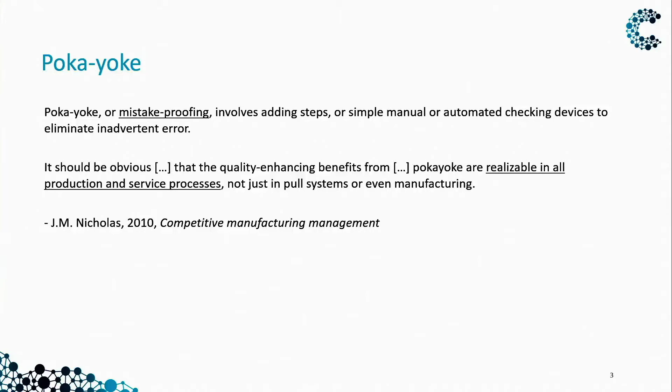In my title, I use the term Poka-yoke, so let me introduce this concept a bit further. Poka-yoke, or mistake-proofing, involves adding steps or manual or automated checking devices to eliminate inadvertent error. However, Poka-yoke is not limited to manufacturing operations. In fact, it can apply to all production and service processes, including production engineering. I will show you how this works by using a practical example. But first, some positioning.

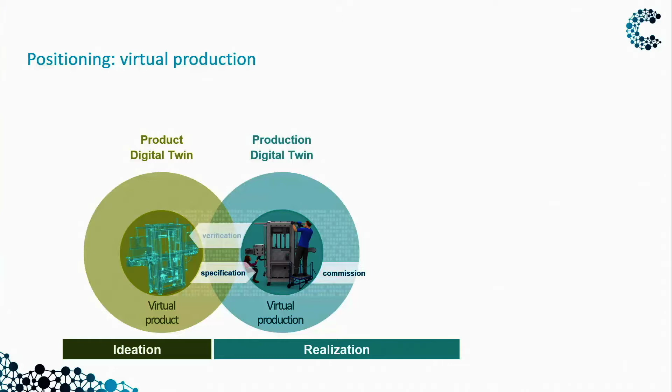Our starting point is a product design. Nowadays, nearly all products are developed using CAD tools in 3D, including data management systems. This product design forms the starting point to think about production. First, however, we will build up the production system in a virtual environment. This way we can optimize the production without making big investments. Once we have optimized the production and made sure it will deliver the right amount at the right time, we can start up the real production to deliver the real product.

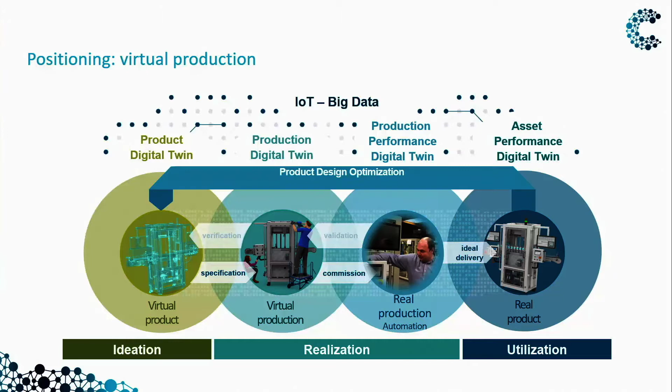It doesn't end there, because we also want to create feedback loops using IoT and big data. So we get a feedback loop to feed back information on how the product performs in the marketplace, but we also want to create a continuous optimization loop between the real production and the virtual production model. So the product design forms the starting point for our production engineering. With the product information at hand, we will start adding additional information. This involves work instructions, quality documentation, but also automation-related information, ramp-up, and in the end also maintenance-related data.

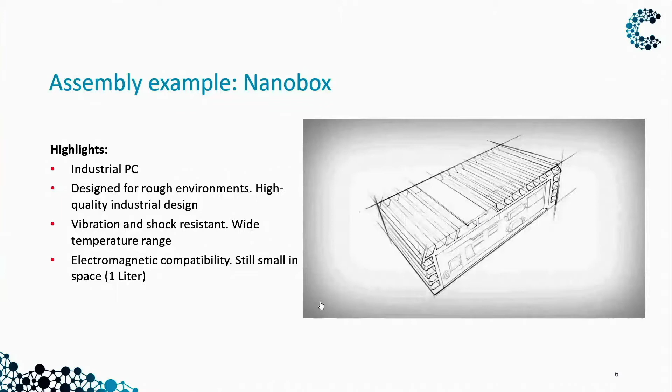To make it more clear, I will show you a small example of a product. This is the NanoBox. It's an industrial PC designed for industrial environments. It's high performance and very robust, and it fits in a very small space. I will use this example to show how Poka-yoke can be used for production engineering.

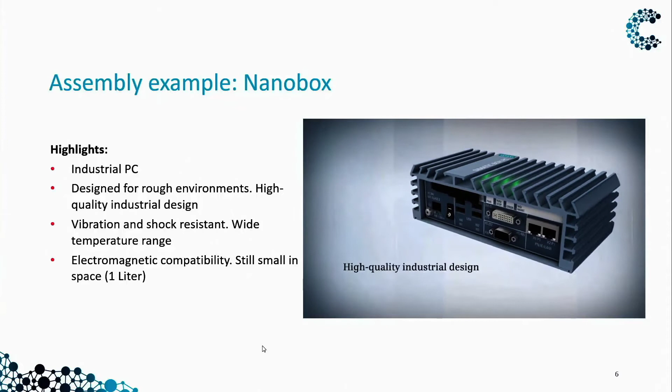The first step is to take the product design and specify some basic information. We do this using a manufacturing process planning environment. This is based on a Teamcenter platform where we first take the product as it is designed and translate it into the product as it is to be made. To do this, we will create a bill of process, also known as routing, and this contains basic information like the tasks needed to make the product, the timings, also the material requirements, and where needed, instructions for workers or for machines, and also the resources that are needed.

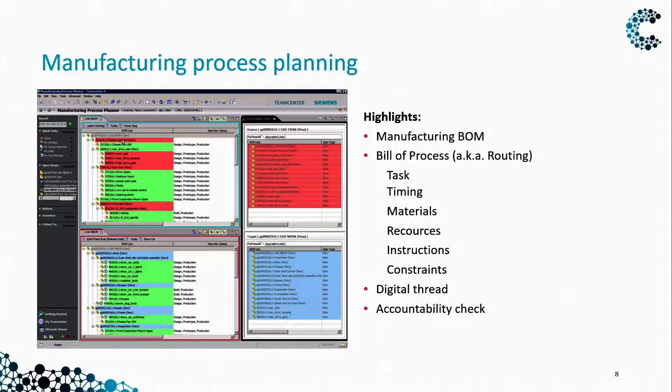And actually, this is a very important step in the journey. On the screen here, you see a lot of different colors. By using comparison algorithms, the user can check whether the manufacturing bill of material and the bill of processes is complete and up to date. This is a very simple but very important first check. So what do we have? On the left, the products, what we have to make. On the right, we have the processes, how we are going to make this product. But please also keep in mind that the data on the left remains connected to the data on the right.

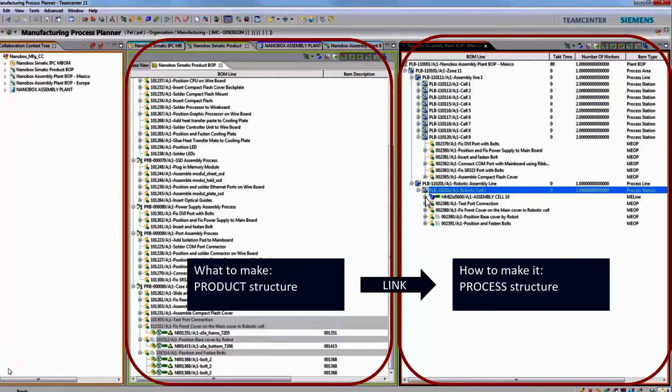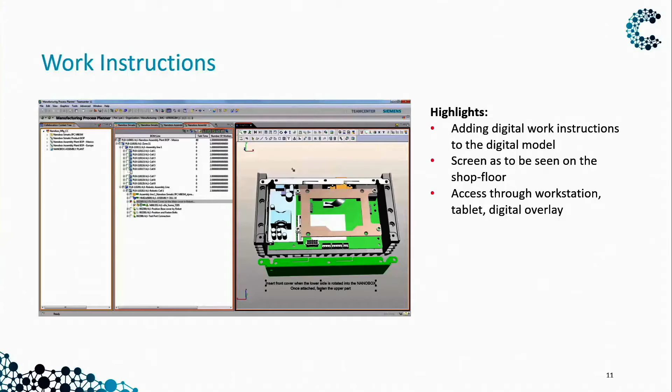Using the same system, using the same data, we can add digital work instructions, building on the digital model that we have already gotten from the product development. The information can be made available in many different ways, but one thing is very important, because as you can see, the product design information is reused, and therefore, if there is a change for whatever reason, it is very easy to trace which work instructions are affected and have to be updated.

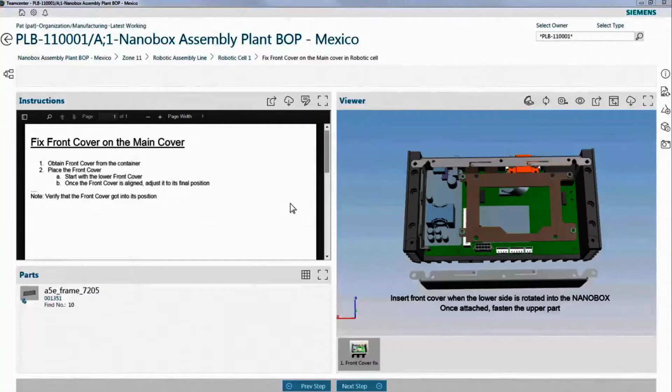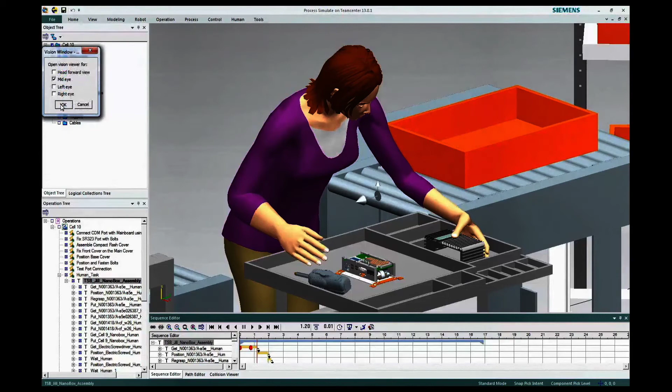The next step concerns the configuration on the shop floor. One of the tools that we can use is a virtual mannequin, a virtual person that has to do some manual task using tools. So here we check the feasibility of this operation for a human. Can the person reach the tools? Can it reach the product? Can it perform the task?

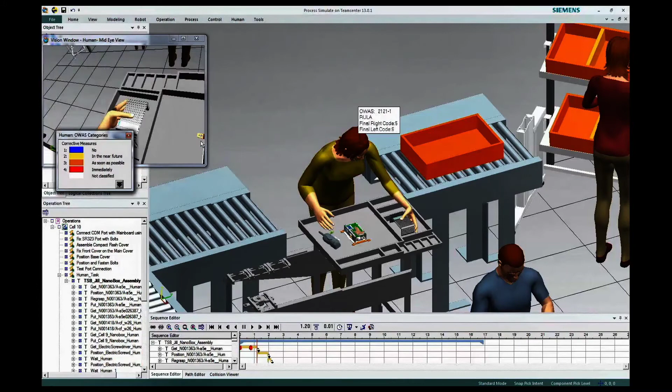And how well would it do so? How much time would be taken? And in addition, we can also check the ergonomic loads on this person. By visualizing ergonomic risks, we can do something about them.

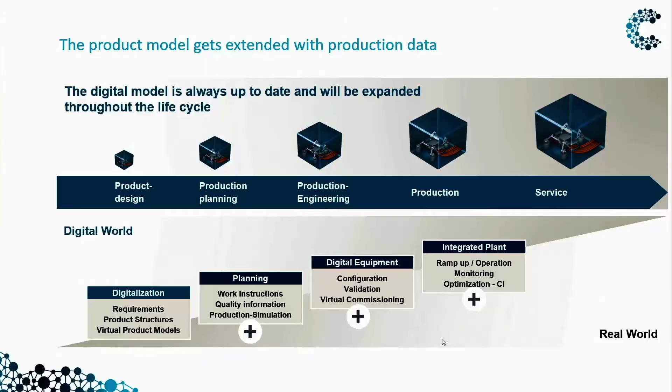We need to check many things at the same time. Sometimes they are very detailed, like the previous demonstration, but they can also be of a more strategic importance. Once we have a rough idea of how many products we want to make, what the timings are, we can also build a dynamic virtual model of the complete production system. Here we use a tool called Plant Simulation.

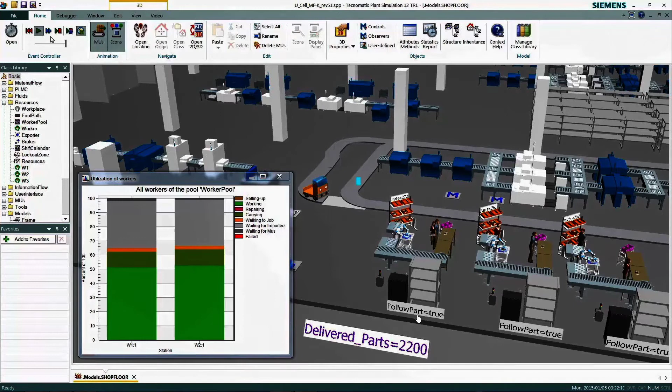The tool simulates the flow of materials through a production plant. During this simulation, the objects in the model gather all kinds of information. For instance, how much work they have done, how much downtime they have had. And this is a real dynamic model. So if there is no material available in a workstation, the workstation will really not perform any work for that time period.

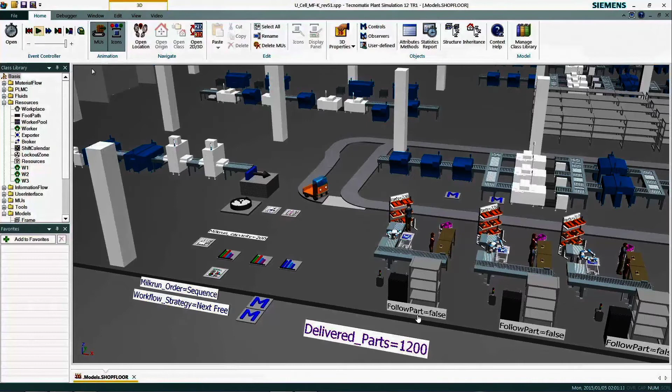By testing against different strategies, different policies, different capacities, we can optimize the production system. In the next step, we can work on line balancing. And line balancing, for one thing, involves making use of constraints between operations.

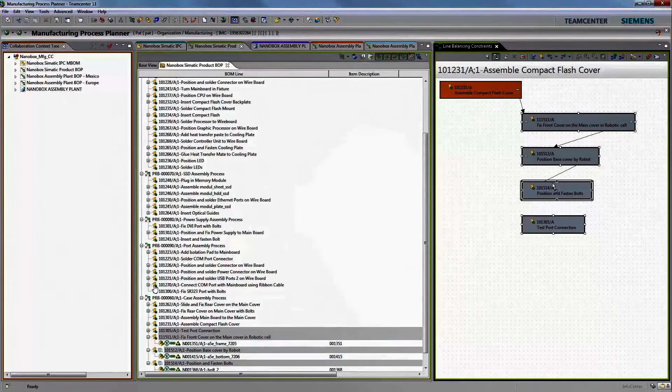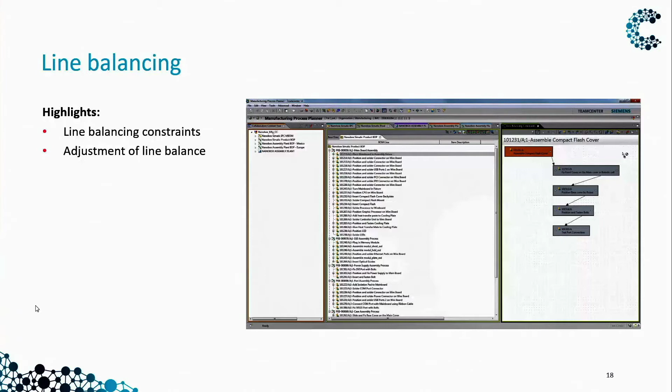Just like building a house, first you have to start with a foundation, then you can make the floor, then you can build up the walls. Once you have the walls in place, you can do many other things like plasterwork, windows, etc. These constraints can also be implemented in the same production planning environment.

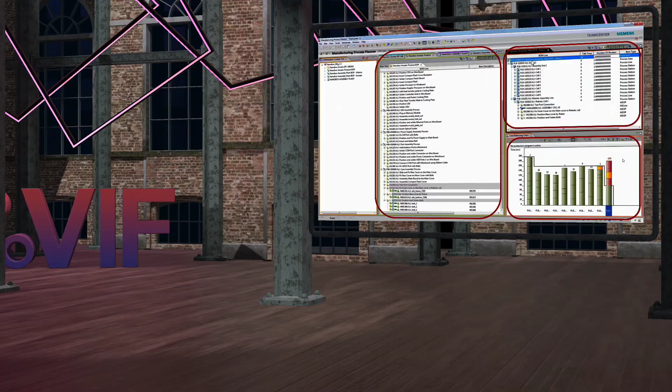By using this information, it is quite easy to see where unbalances are. Like in the picture, we see a few tasks in a station that overload the operation. So we can and should definitely redistribute these tasks to other stations.

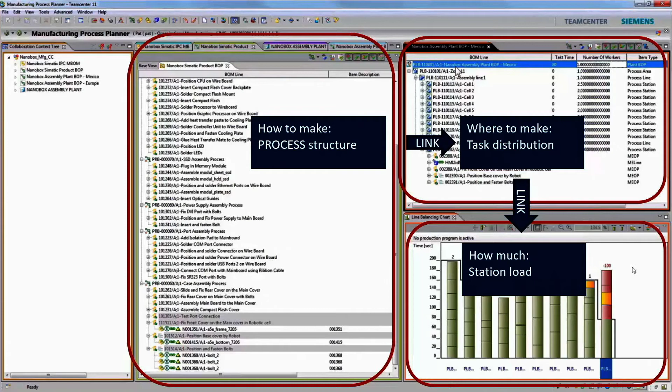So now we have taken the information that we were working on even further. We have the process structure, we know how to make the product, but now we have also linked this information to our production plant. We also define where it's made. We distributed the tasks over the workstations and the workers, and we can see where bottlenecks will appear.

There are four pillars to this so-called Smart Innovation Portfolio. First of all, we want to give the right information to the users at the right time. So a production engineer should and will use different tools than a product developer. Another important pillar is the use of intelligent models.

Remember the humans that you saw? The humans know what movements they can make, and they work goal-oriented. This helps in speeding up the creation of these simulations. In addition, they also know when they are becoming overloaded and get into risky positions.

Nevertheless, of course, we work on virtual products and virtual production first, but in the end, it all is about making real products and delivering them to real clients. And of course, these clients have feedback, and so we also want to be adaptive, and feed back new information, new circumstances into our system and update our production accordingly. This is called the Smart Innovation Portfolio.

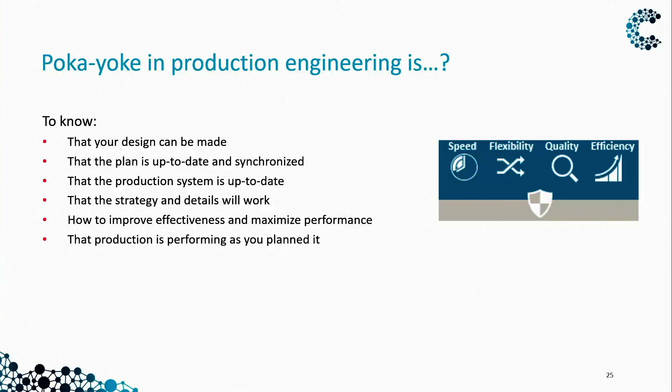So, what is Poka-yoke in production engineering? Well, it is to know that your design can be made, that your production plans are up to date and synchronized, that the production system is up to date, that it will work both at the strategic level, but also that critical details have been checked and tested. And we know by using smart simulation tools where we can improve and optimize the performance. And in the end, production is performed as we planned it.